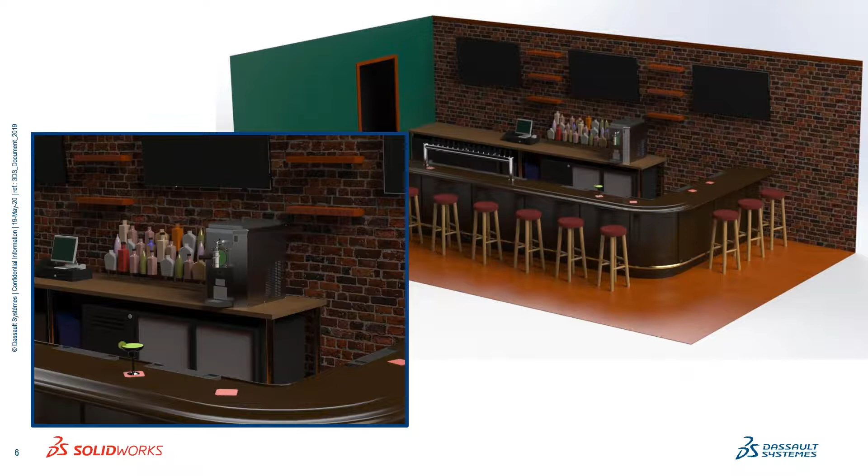So Thomas, we have here this design that we started with. We came up with an idea—I think it was the marketing team, or maybe the sales team, that said we need to come up with something new, and the first webinar had to be on Cinco de Mayo. So somebody made a joke about doing something with Corona, and that didn't really go over very well, especially given the circumstances we're in right now.

So we decided to go with a blender idea—somebody suggested it, and I thought maybe margarita. But as I started looking into it, I realized a blender doesn't do a lot for electrical—maybe a couple small buttons and a power cord you plug into the wall. So we came up with this commercial unit instead, which has a lot more to offer and can hopefully relate to a lot of our customers out there using these tools.

As you stated, the main goal was to take a project from start to finish—given the situation, with JP and I located geographically in separate locations—to see how we could collaborate similarly to the circumstances our customers are in, creating a project from start to finish.

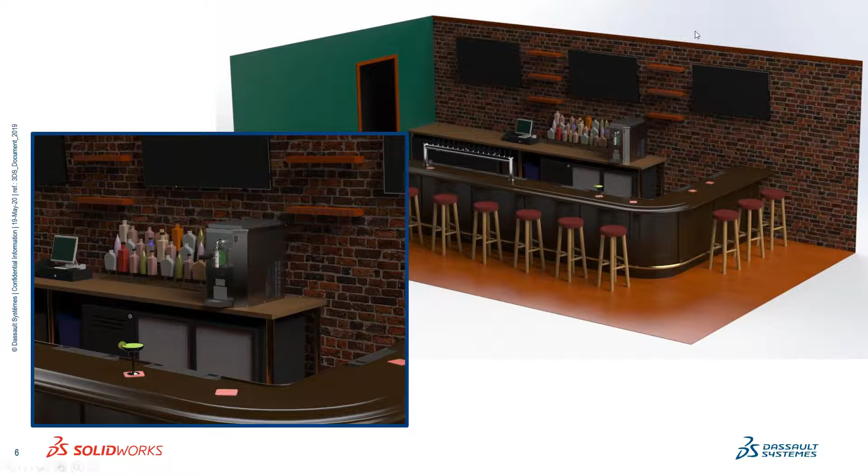For this webinar series, I'd do a whole bunch in a row if I could, but what we have here—let me close my webcam so you have full screen—are two sequential sessions. The first session, if you missed it, really drove the project creation and initial workflow; that was the one we held on Cinco de Mayo. During that session we talked about project planning in the 3D Experience.

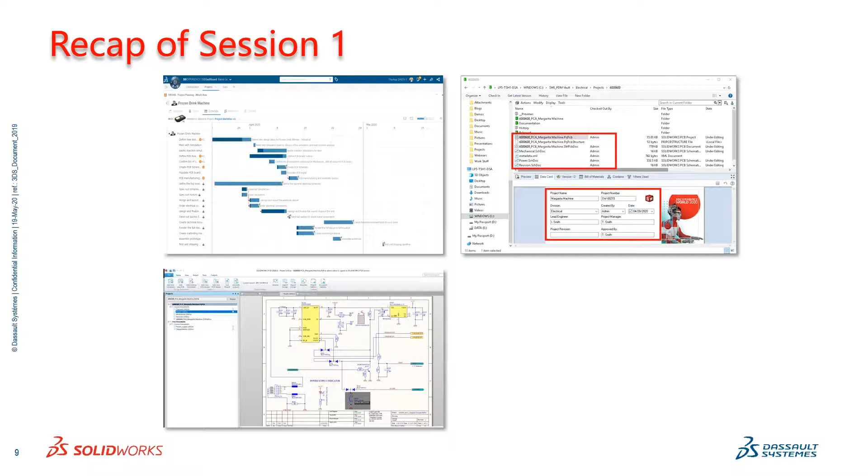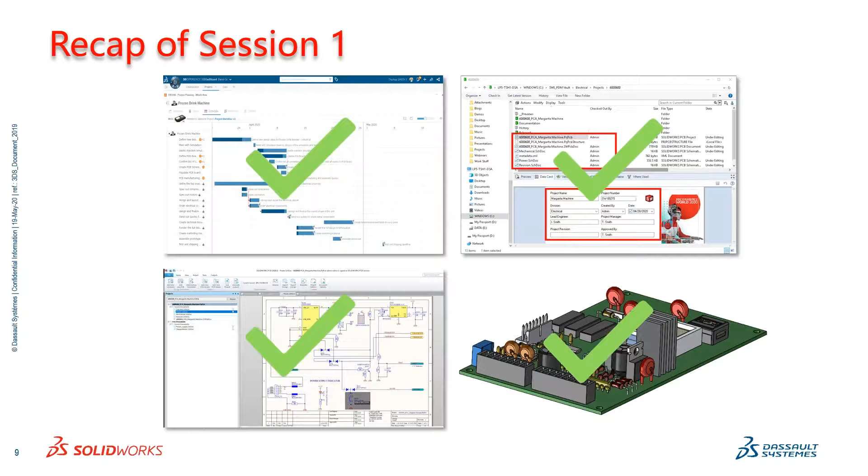We also talked about PDM, and we created our projects for PCB and SolidWorks Electrical inside of PDM ahead of time. Then we went into the SolidWorks PCB schematic tool and the layout tool, and we started to show some of the intelligent features within that tool, as well as the main piece of the puzzle when you're talking about SolidWorks PCB, which is that communication to SolidWorks itself, so that you can get your overall board design shape on the first try rather than the 7th try, saving you a lot of time and money in all the different iterations of that board.

Today's session is continuing in the design analysis and finalizing our documentation with our overall Margarita machine.

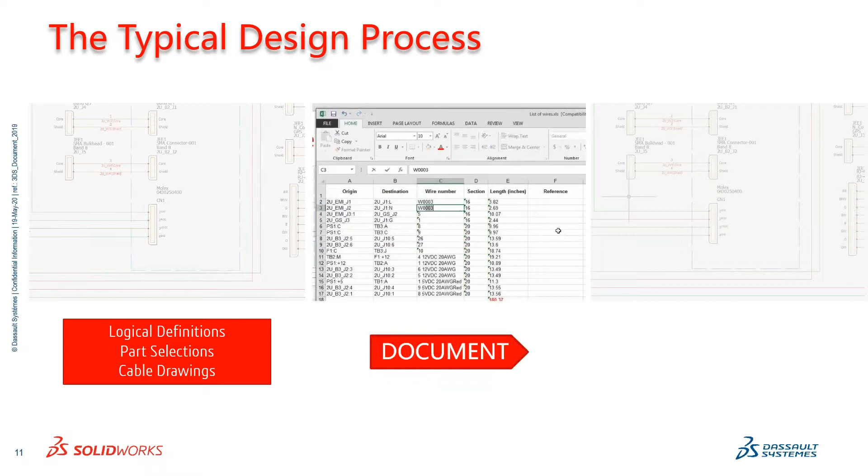If you're unfamiliar, the typical design process I see is people dropping in blocks, dropping in wires, drawing text boxes to create their schematic. Then they're taking all that information and pushing it into spreadsheets, creating their bill of materials and to-from wire lists in something like Excel. And then they still have to go in and audit all that information. That's the typical design process.

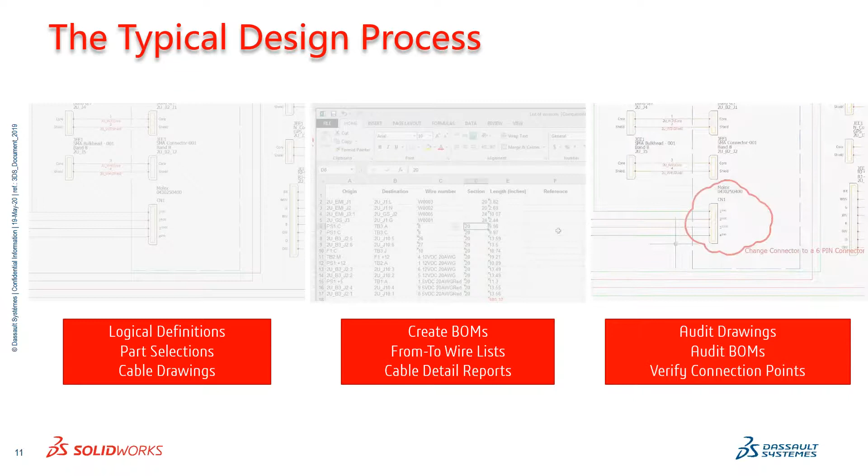But what SolidWorks Electrical allows you to do, I call it the SolidWorks Electrical difference. It allows you to take a lot of that auditing and reporting and bring it up front while you're doing your design, because SolidWorks Electrical generates and maintains accurate reports while you design. So if you drop in a symbol and add metadata to it, you are adding that information to your bill of materials. You don't even realize you're doing it, but you are, because of the way the database is structured and the way the software is designed, allowing you to do that smoothly, quickly, and intelligently.

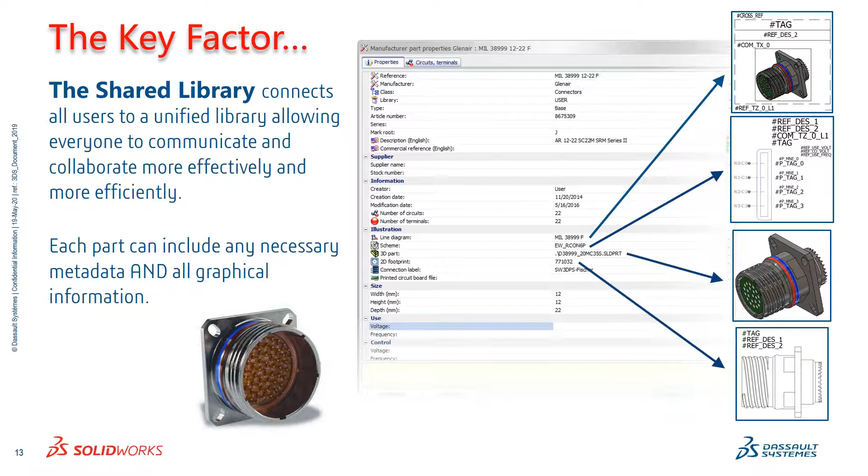There's information associated to those different symbols on our schematics and line diagrams, which we'll get into. But if I need to make a change to the manufacturer part information we see in that window, that information will then be pushed out to those symbols without me having to go to every version of that symbol in my schematic. It's automatically going to push that information out, which can be very helpful.

Another key factor is the bidirectional communication we have. If you notice in the center of the screen, the component tree is the same on the electrical side as it is on the mechanical side. So as the electrical engineer, if I define something, the mechanical engineer simply needs to select that part and can insert it based on the manufacturer part information, as long as there's a solid model associated to it. And the same thing goes for the mechanical side.

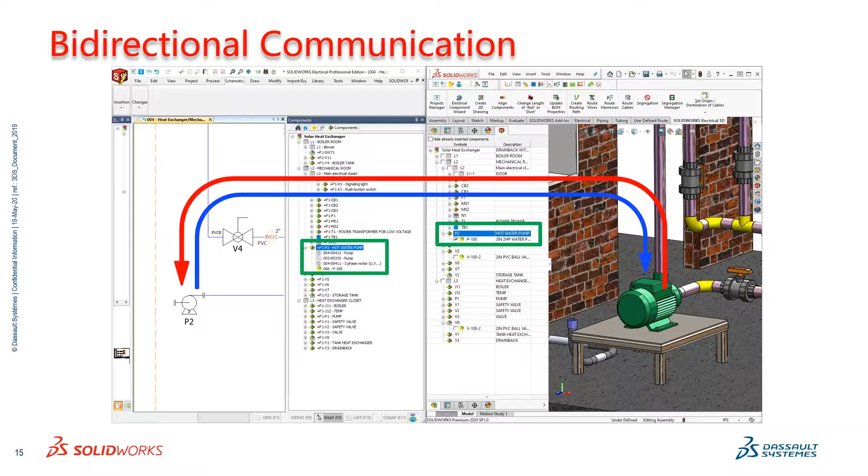If I'm a mechanical engineer and I know the spec of the pump, valve, or motor I want to use, whatever it may be, I can define that and add it to my component tree. Now on the electrical side, all I need to do is simply insert, and I've got the symbol that has been associated to that manufacturer part.

So what are we really expecting to see here today? Yes, we're working with a Margarita machine, but it's so much more than just a Margarita machine. I'm going to go in—I know I have a task pending in my schedule here. I'm going to go ahead and move that over so that I get notification, and the rest of the team gets notification that I am working on a particular task in our project.

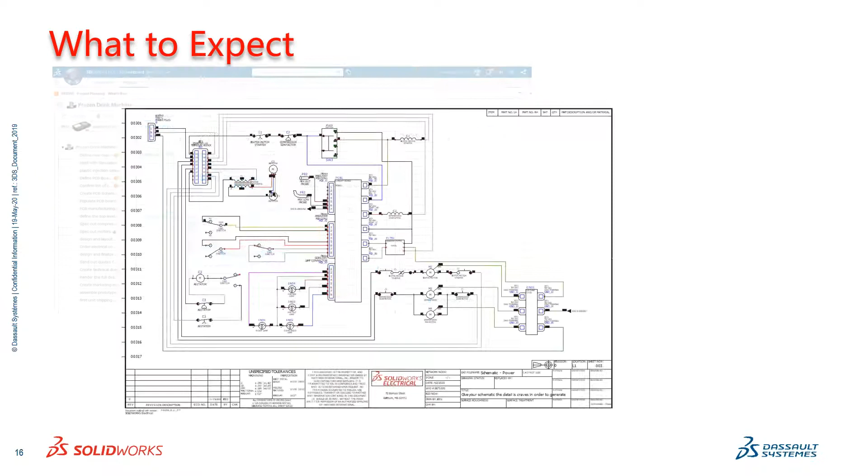We're then going to go into the intelligent functionality within SolidWorks Electrical. We're going to go into the 3D model and show some of the connection I just talked about, that two-way bidirectional communication, as well as our wire routes. Then we're going to finish it off with all the different types of reports we can create, as well as some other surprises I have along the way.

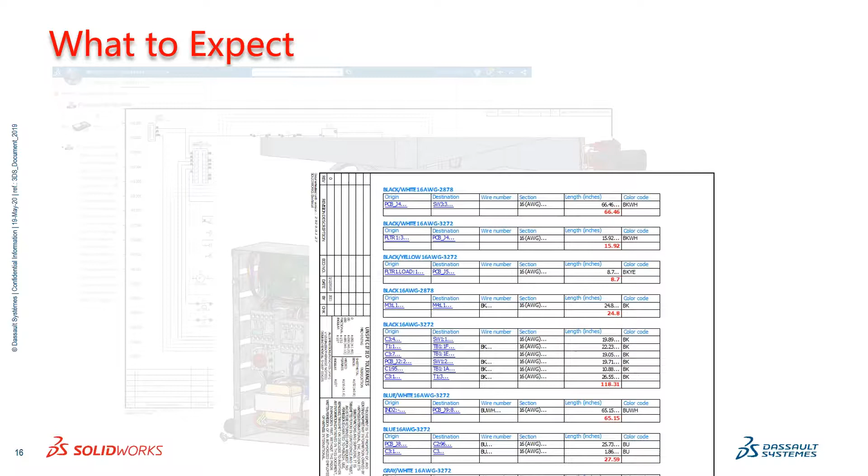So the first thing, as I mentioned, is our project planning. I am in Google Chrome right now, but I am also up on the 3D Experience platform in my dashboard that Thomas and I have set up for this particular project. We can see here, I have a lot of different tasks for this particular project.

This gives me a great view, a great timeline about this particular project. But there's also a way to organize these and see what I have pending, tasks that I need to work on within this particular project. One of them is this agitator circuit. I can add additional information about it, but what I really want to do is let everybody know that I'm ready to start working on it and that it's now in progress.

At the same time here, Thomas, who is the other person involved with this particular task, probably just got a notification on his side saying this task just went from to-do to in progress, letting everybody else know. And of course, I can have multiple users associated to that as well.

So additionally, let's jump into SOLIDWORKS, the tool that most of us, probably all of us, have seen or played with and enjoy quite a bit to actually use.

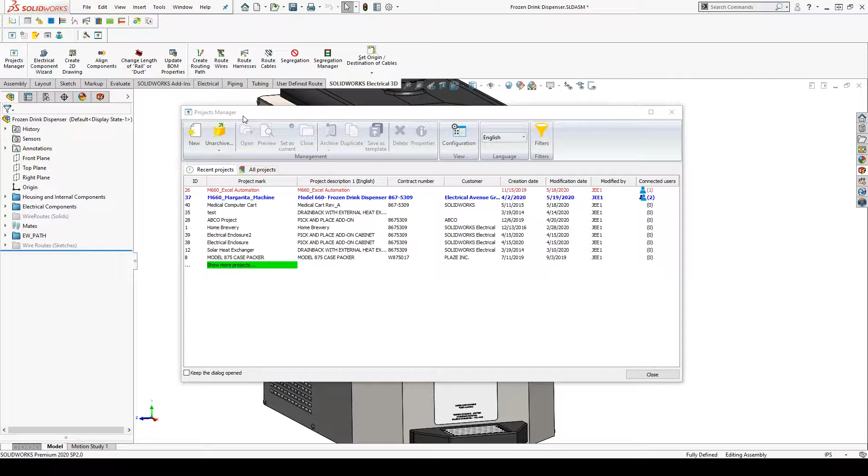When you're working with the SOLIDWORKS Electrical add-in, one of the first things you need to do is work with the project manager. You'll see this again in just a minute when we go over to the electrical side. The project manager is where all of our projects that have any type of electrical collaboration are controlled from. This is where we would open these projects up and control them.

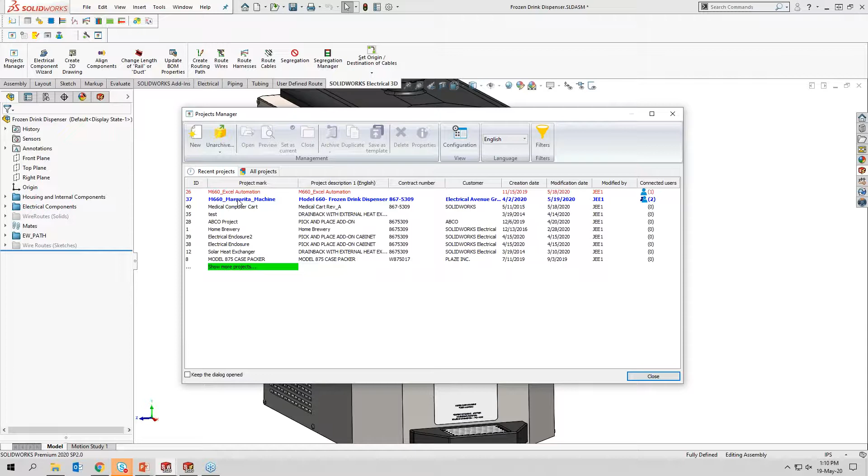You can see here that I actually have two different projects open. The blue one is the one you can see behind here right now, which we'll get to in just a second, and that shows I have that open here on the mechanical side. Anything in red lets me know that other users out there also have a project open. In this case, it's me as well on the electrical side, but we'll get into that in a few minutes. You can see that there's at least this visual aid to see who is working on what within your environment, so there's no confusion going forward.

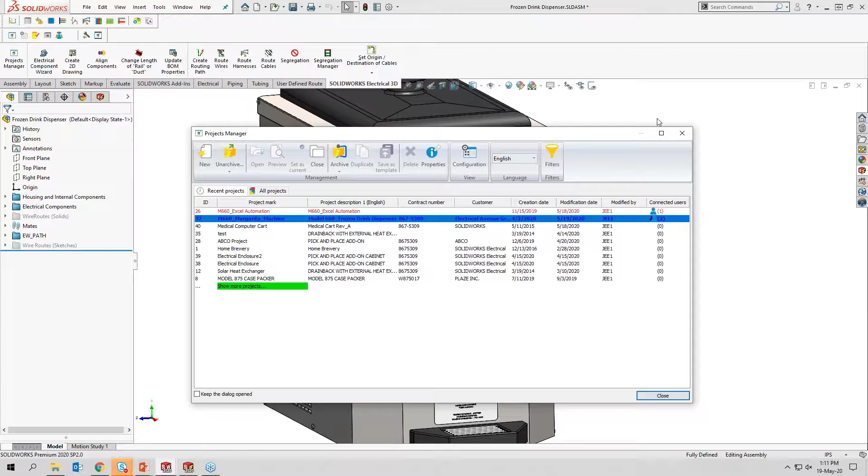But one of the things I do like to talk about is the document tree that we have inside of SOLIDWORKS Electrical, in particular the SOLIDWORKS Electrical add-in here. We can see within this document tree—let me expand my window here so we can see.

This is totally—hey, yes. We're experiencing some audio issues, and the audience, I think pretty much across the board, is just breaking up. Can you still hear me? Yes, it's sometimes breaking up. Just wanted you to know. All right, heads up on that. Okay, let me know again, cut me off again if it starts to. I hope I didn't lose anybody too bad on what I was just talking about with the project manager.

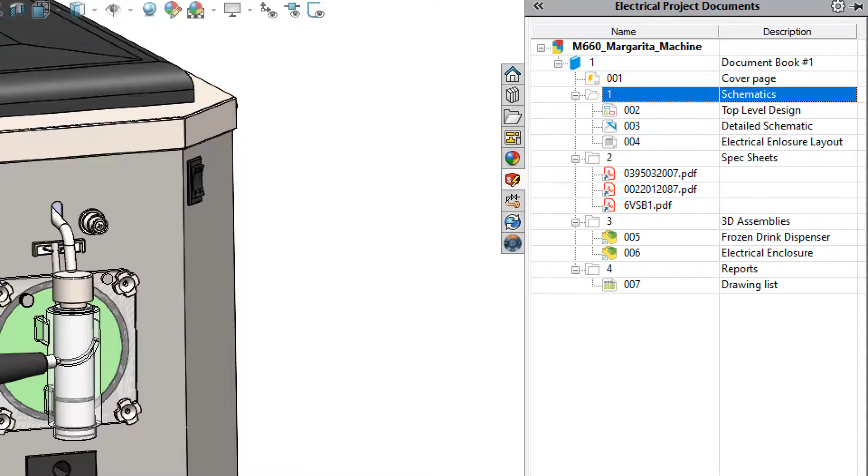All right, so continuing forward here, what we have is our document tree for this particular project. Now, this is how I organized it. Nothing says you have to have it set up this way. You can see here I have a book, I have folders within that book, but if you already have a company structure you like to conform to and set things up with, then you can definitely do that. We can help you define that project in a similar fashion.

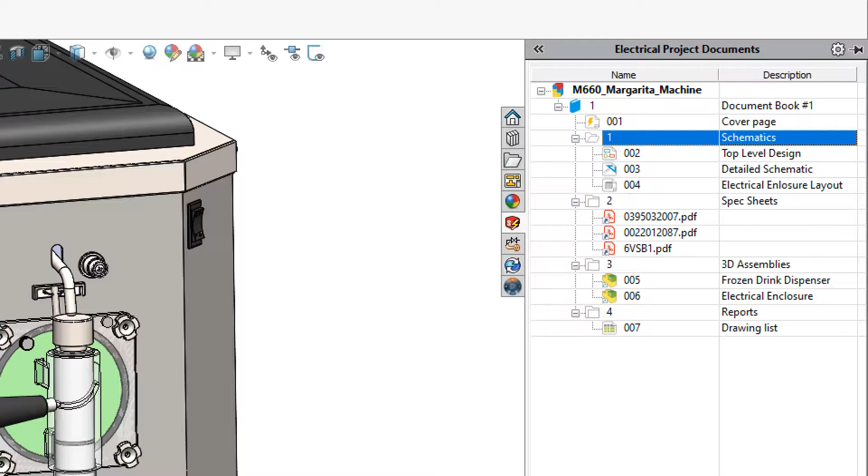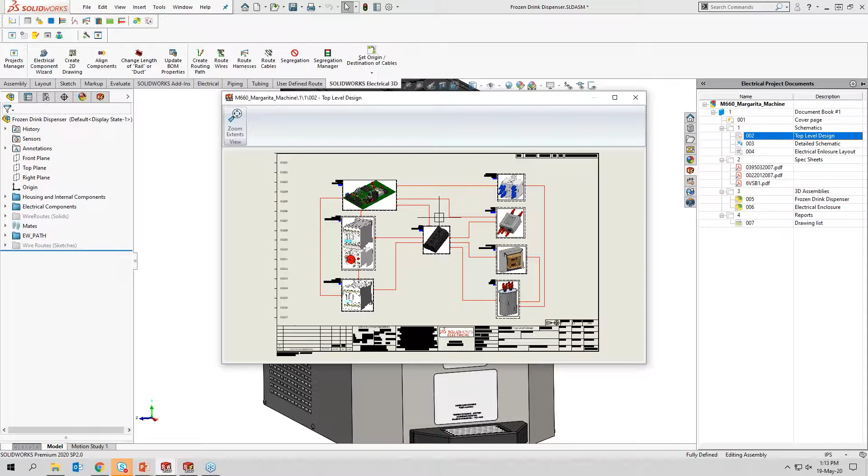Now, the nice thing about these document trees here, especially from the mechanical side, is I can go ahead and open up one of these files and see the progress being made on the electrical side. Now, I can't edit this file from the mechanical side, but I can at least view the information that is there. So if I need to know something about this particular circuit board or this contactor or terminal block, it's here, available for me to find out without having to track down the electrical engineer or whoever built this schematic—maybe they took off that day. So it's a nice way to figure out that type of information.

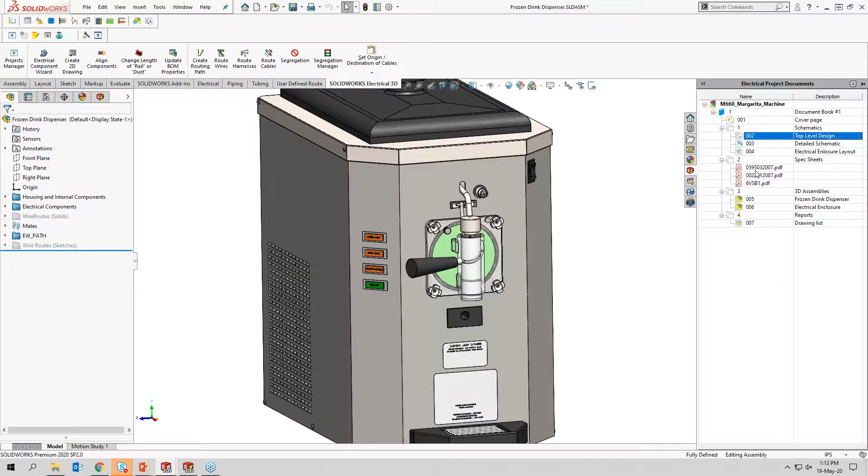The other really nice thing I thought was cool when I first started using this is the ability to actually embed spec sheets right into my project, or point to a folder where all my spec sheets are controlled from or housed, maybe in my vault. By having this hyperlink right in the project, there's no confusion about what parts are being used or any of the information about those parts. And if I have access to it, that means Thomas has access to it, and Joe and Ingy and Eric also have access to it.

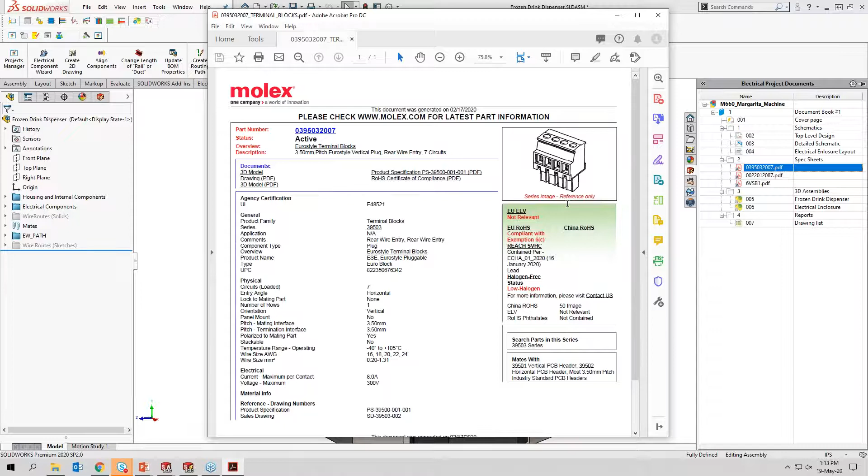Going back to our model here, our first look, I don't know if we really took a look at it last time when we were working with the PCB side, but you can see here we have our assembly. I have it open right now because I wanted everybody to get that visual aid of where we're going within our schematic. So let's go ahead and jump right into the SOLIDWORKS schematic tool.

I have SOLIDWORKS Electrical open, and the reason I have it open already is first I'll show the project manager. You can see here that both of them are in blue now because I have two projects open within my document tree. But the reason I have it open is because I've already checked it out inside of PDM, so this is connected to PDM right now. I have everything set up. We have a PDF in here, we'll get into this again in a little bit. I have everything organized just as you have it organized here.

And when I go to check this back in later, we can see the PDF, the Smart PDF as well, that we'll get into. I won't go too deep down that rabbit hole right now.

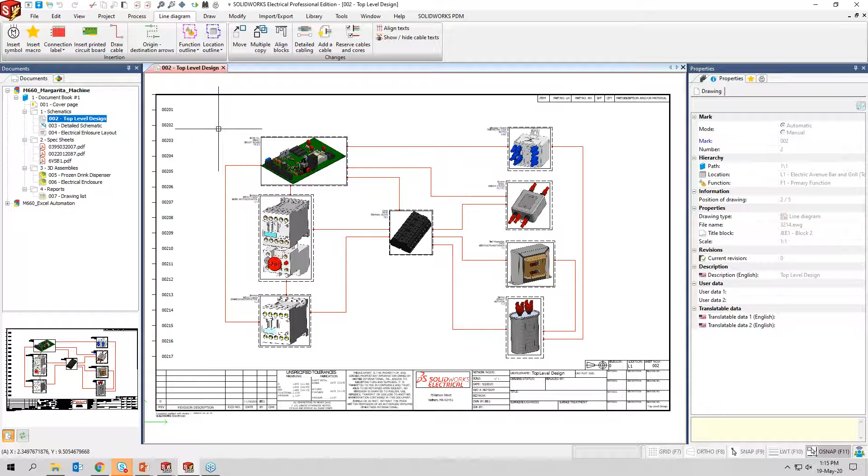Inside of our document tree, same document tree we just saw on our mechanical side, let's take a deeper look at the different types of sheets we have. The first one I call more of the high level overview or top level design, but it's a line diagram, a block diagram. This is just what I like to use it for because I'm always doing detailed schematics, but there are a lot of people out there who can just use this as their basic schematic. And by even creating just this basic drawing, I can connect models and start to create valuable outputs such as our bill of materials, our to-from wire report or cable report, and connect it to the 3D assembly as well.

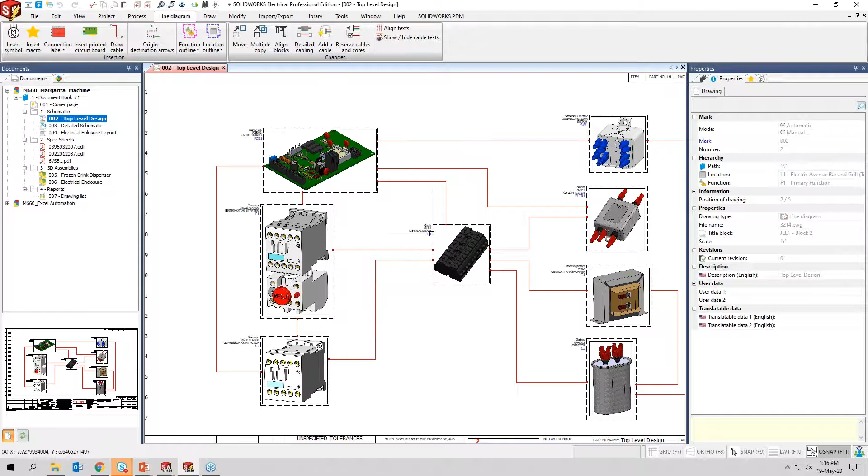And if we notice here, I can start with this. So maybe I don't know the detailed pinout yet for all my connections that are going to be on my circuit board, or what pins or connection points I'm going to be using within my contacts or my terminal block. But I do know I'm going to be using those parts, so I can start to really develop my bill of materials right from the get-go with just a basic symbol with just some basic metadata.

The other nice feature here, before I jump into the schematic, is our 2D cabinet layout. We have the ability to create a 2D cabinet layout on the 2D side before we even really want to jump into and invest a lot of time in the 3D assembly. We can also just do it here on the 2D side.

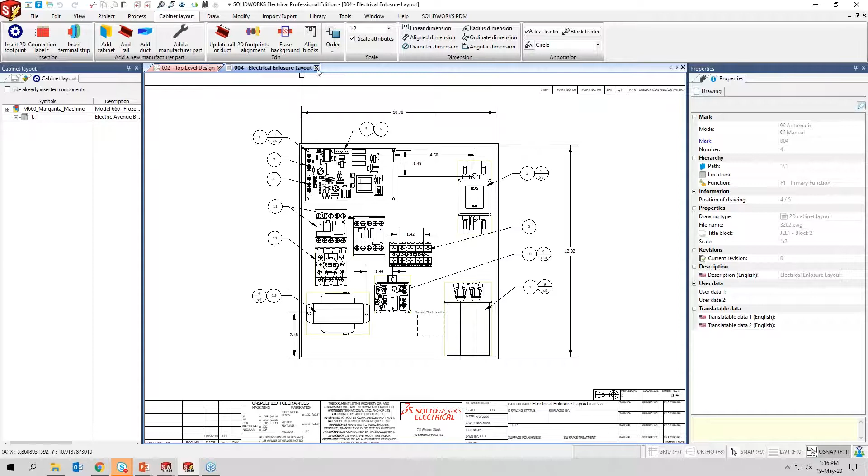I want to show you some of the intelligent functionality that's already available. If you want to learn more about adding symbols or drawing wires, we have plenty of other videos up on mysolidworks.com about how to create that information. But what we're going to do here is use a macro, not an Excel spreadsheet macro, but more of what I personally like to call a common schematic, something I'm going to use over and over again. In another project I worked on in the past, I've already created this agitator circuit.

I'm simply going to go ahead and drag this in, and place it roughly right here. I have the ability to change information about that before it becomes part of this project, but I know what I'm doing with it, so I'll go ahead. Let me try that again... I guess I don't know what I'm doing with it, it didn't do what I wanted. Here we go, so I'm going to keep the existing mark. There we go.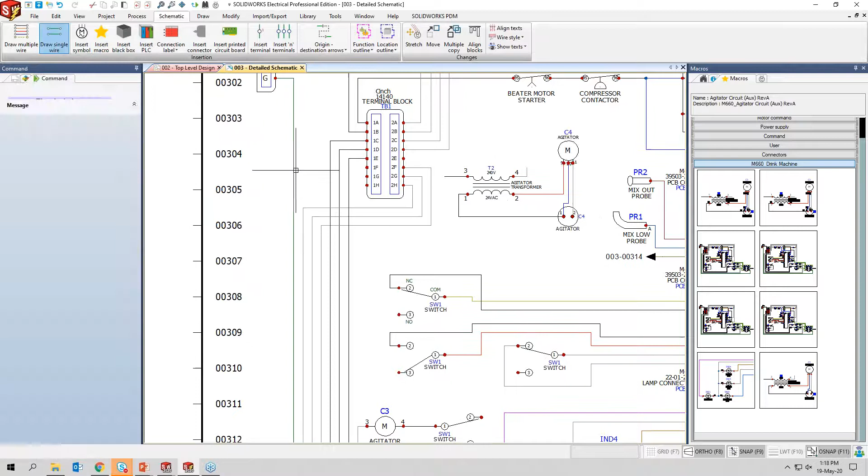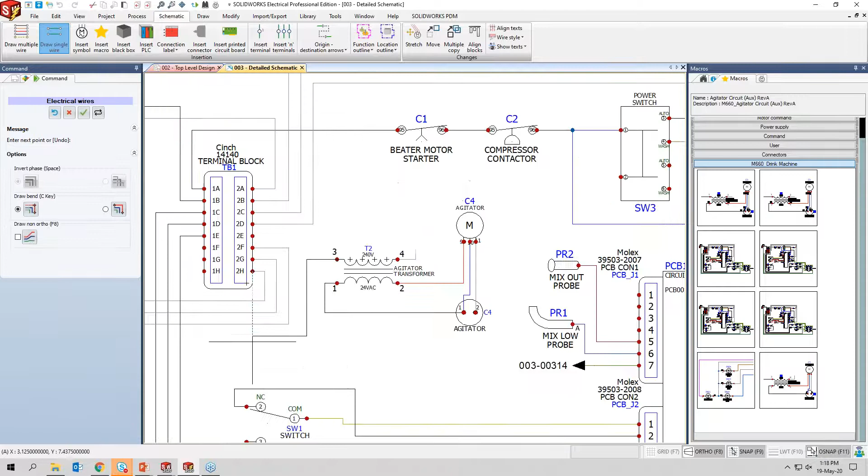I do need to go into the wire tool here for a second, but the really nice thing about setting it up this way is, if you notice in my macro, I have a couple different wire styles, a black wire and a gray wire. I don't have to go into my wire style manager to find the wire type I want to use. Based on the wire I select, it'll automatically grab the properties. I'll go ahead and hook this up, and do the same thing over here.

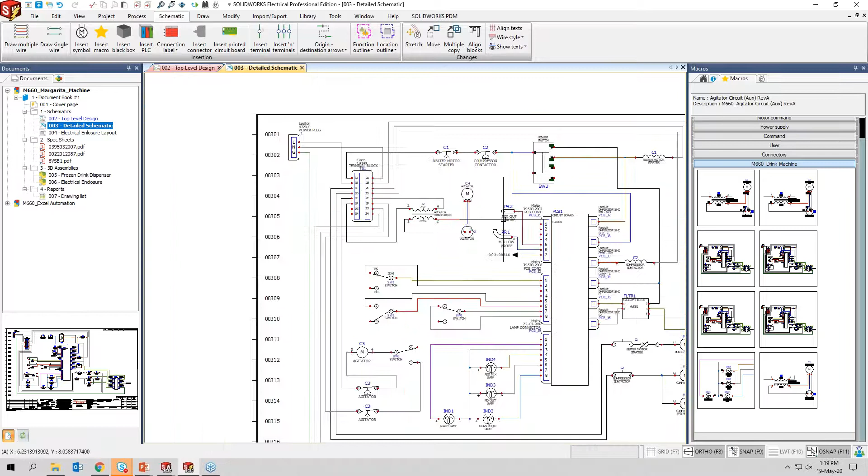And just like that, I've now created this new circuit. It took me a total of 30 seconds to really create this circuit. I did build it ahead of time, but let me show you how I built that ahead of time.

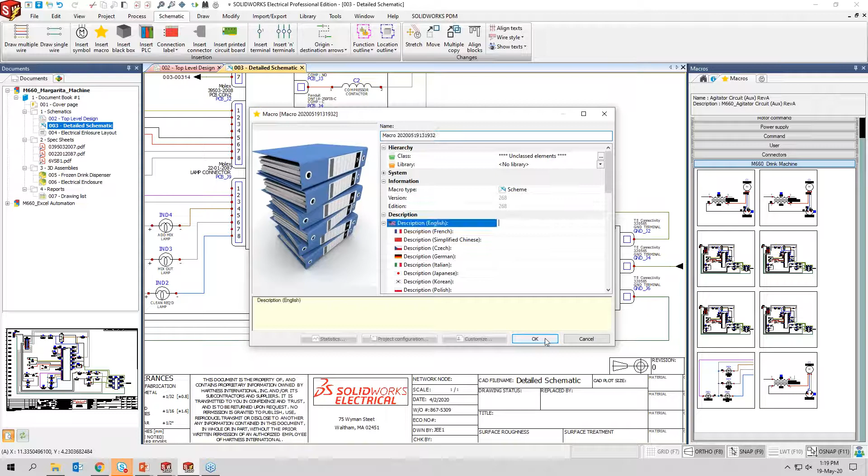So very quickly, in order to create a macro, let's say these circuits down here - maybe this part of the circuit is something I'm going to reuse down the road. All I need to do is simply highlight those parts, grab it right here, and drag it over into my macros palette. I can give it a new name, put it in a specific library, and define it a little more with a better description. And just like that, I've now created a new circuit that I can reuse over and over again.

It's extremely more intelligent in the fact that now I don't have to go find that old project I've been working on and copy and paste with the old Control-C, Control-V feature we all know and love, grab that from the old project, pull it in, and try to line everything up just right.

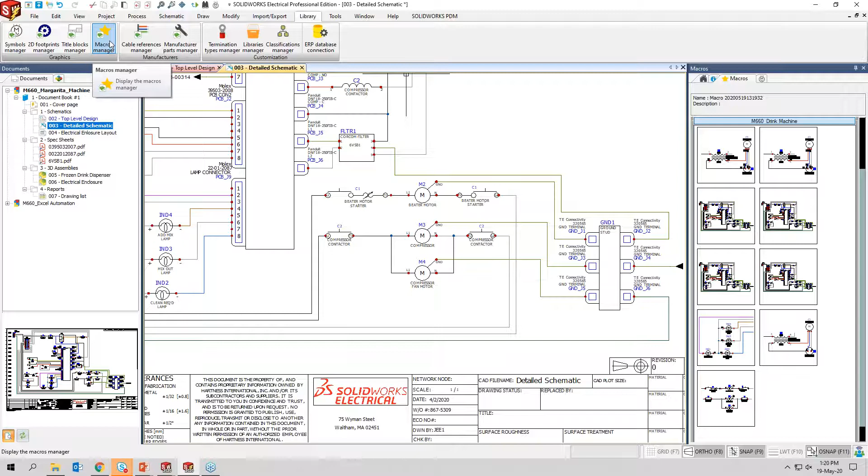The nice thing with this also is that all the metadata about these symbols and parts are included within that macro. The other nice thing is that because we have a shared library and my group here is sharing the same library, once I create this macro, immediately everybody else has access to that same macro. So I can be in charge of creating all this content, and everybody else can go ahead and utilize and absorb that information in their projects, depending on what they're doing.

Taking this a step further, the macro feature is probably one of the most powerful features in the software. If you notice here, I have several different versions of these same circuits on the right-hand side in what we call our macros panel, or macros pane.

There's a feature in SOLIDWORKS Electrical called Excel Automation. What Excel Automation does is allow me to take these macros, utilize the naming convention I have for these macros, and create an entirely new circuit based off of that.

Now, what do I really mean by that? Well, first let me go in and set this as current. And I'm going to go into my 3D Experience platform again, where I have what we call our project configurator. It doesn't want to play, so I luckily opened up the actual Google Sheet I have for this.

You can use a regular Excel spreadsheet or Google Sheet if you want to collaborate with multiple users. That macro naming convention that we have for each one of those macros, I've defined and made a list inside of Excel. And as we all know, Excel is extremely powerful. So why am I doing this? What is the purpose of creating this?

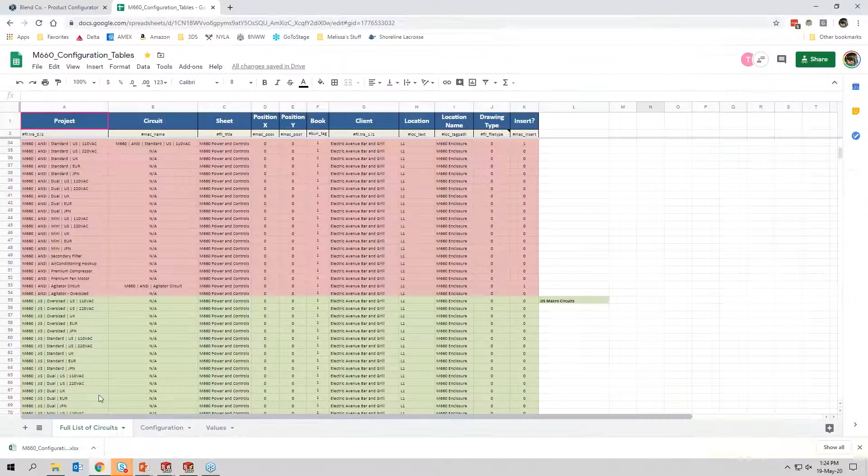And again, if you want to see it change live, if you don't believe me here, everything's set up as ANSI. I'm going to go over and I'm going to change this to IEC, and let's go ahead and take a look. Notice that those automatically change to IEC.

So now for this customer, I would come back in and go to download. I can find that - it's going to create another file for me. So very quickly, we can start working with the same schematic information, but be processing this in, and our design cycle becomes that much faster based on this type of functionality that we have here.

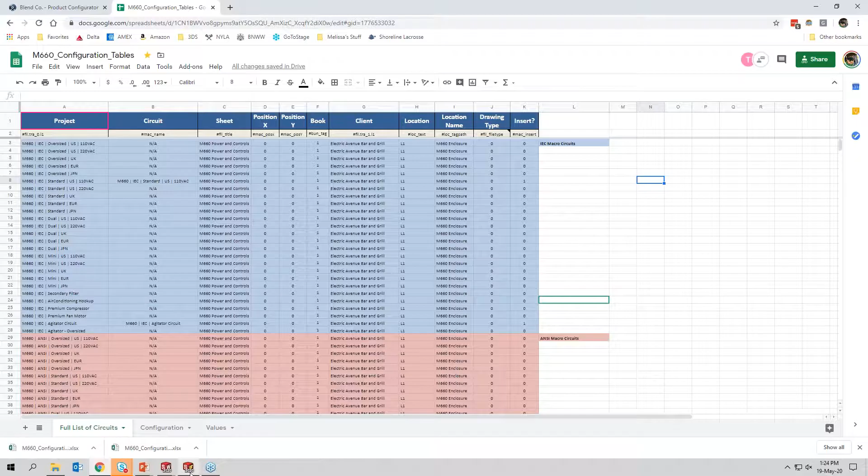Once we're done with our Excel automation, I'm going to go ahead and close that out. I just think that's a really cool feature. I wanted to bring that up. I think it's extremely powerful.

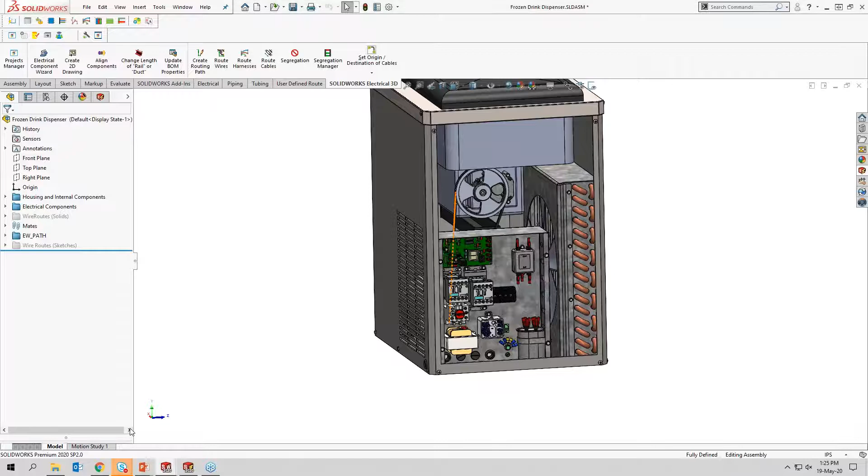But what we're really going to be working with here, again, is our main schematic. And let's go ahead and connect this information back over to our 3D assembly. So we have our 3D assembly after we did all those tweaks to our schematic, and we have our component tree, that same component tree.

Remember that slide I talked about, the bidirectional information? This is that component tree I'm talking about. Well, there's a couple parts that we just added, right? We had that transformer and we have our cap that we have to add in here. So what we're going to do is we're going to find those parts.

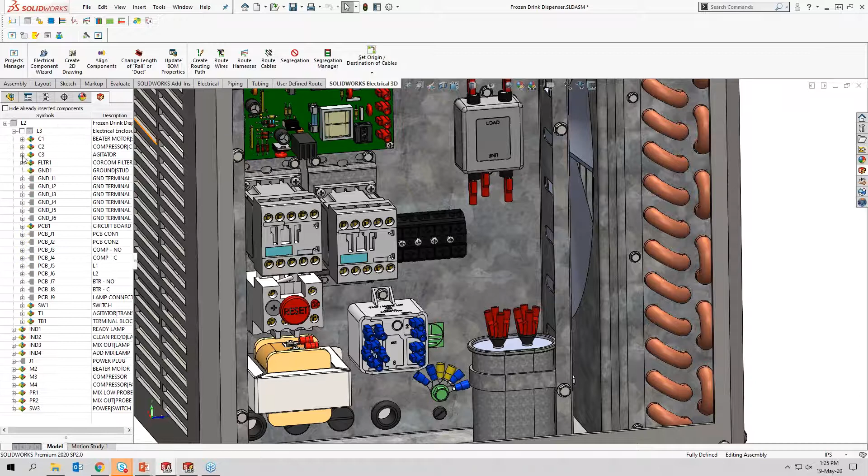And T1, which I think I was messing around earlier and I added them, so we're going to just remove them and I'm going to put them back in again.

So as the electrical engineer, a lot of people get scared when they try to jump into the mechanical space. There's a lot to do in the mechanical space, but what I want to show you is something that is extremely easy to do, and you don't need to know how to do a lot inside of the mechanical side of the tool. You can let the mechanical engineer or your team of mechanical engineers put this whole thing together. They can mate everything up and put everything where they believe it should go. But in reality, do they know which one is contactor 1, which one is contactor 2, terminal block 1, so on and so forth?

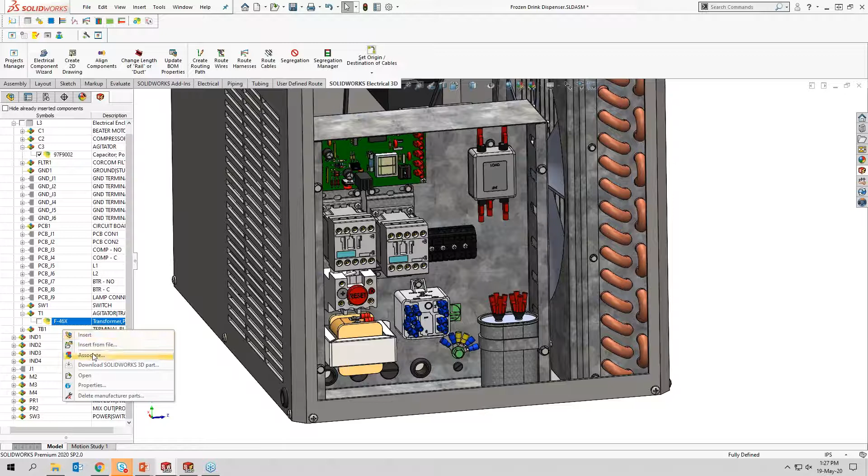Maybe, but you probably know way better than they do on where those parts are. So what you need to do is simply find that part. So in this case, T1, I'm going to simply select associate. I'm going to find that part, highlight it, I hit enter, and that's it. I've made that association. There's no manipulation of the model other than you're telling the software, hey, I want this to be called Transformer 1.

And just like that, may take a few minutes to get all those parts in there. I've already gone ahead and added all the information and associated all these parts up to my mechanical assembly.

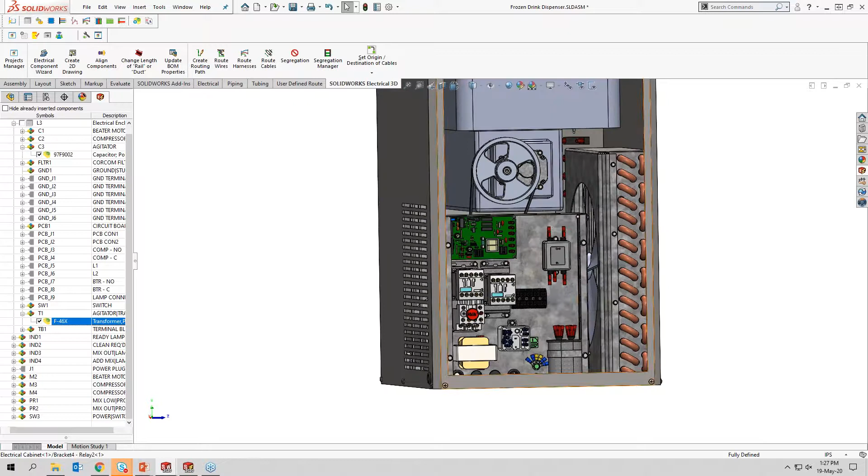Once I have that, the next step I'd want to do is go in and define what we call our EW path. Why do I want to create this?

Well, this is our guideline for our wires. Because if I just go ahead and draw wires and try to route them, we want to go in and actually get lengths for all the wires and cables in our project. We need to tell the wires where to go through certain bulkheads, around a duct, or up in the overhead, wherever that stuff needs to go. Otherwise, if you don't put this in, it's still going to route, but it's going to route where it wants to, not where you told it to.

So by setting this up, which doesn't take very long, it's a simple 3D sketch, we can go in, and after setting that up, we can route our wires, either as a sketch line or a full solid route.

Now, to save some time, I've already routed them, because we don't want to sit here and wait 3 minutes for a sketch and maybe 10 minutes for a solid route, which is still a lot faster than trying to route every single part by hand using standard points in the software.

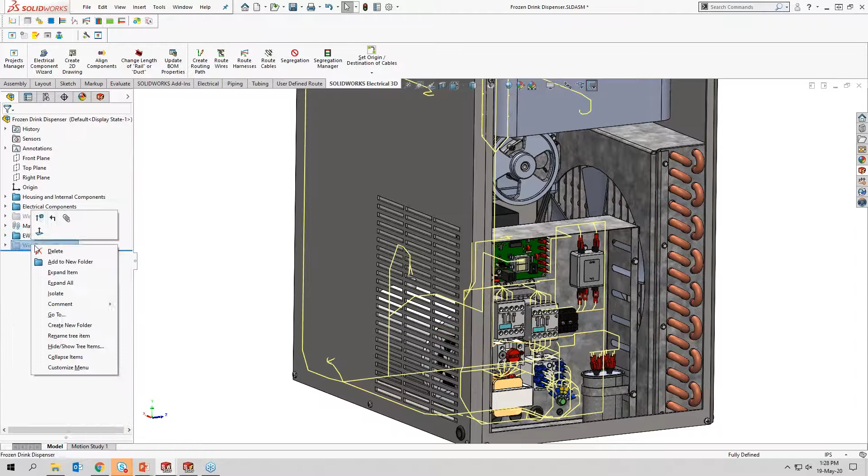So taking a look at those different types of routes, let's see what we get here for our sketches. You can see here, let's turn off our EW path so you get a better view. So this is what our sketch lines look like.

And the nice thing with sketch lines is it's a quick down-and-dirty view of what your wires are going to look like, and you also capture the length, so you don't even necessarily need to do the full solid route.

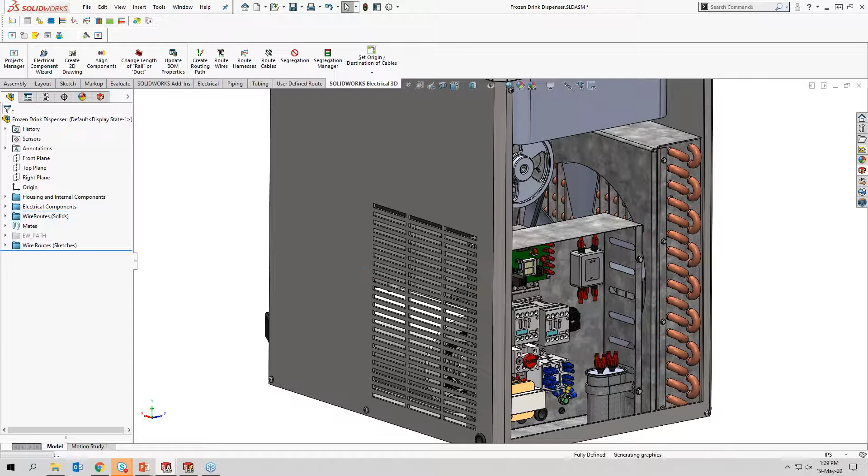But I know a lot of people like to see what the solid route looks like, so here it is for your viewing pleasure, the full solid of all the wires being routed, which is great. You can start to figure out fill duct ratio as necessary.

The other cool thing about it too is now I've created this, you may have seen an image on one of our platforms of where we push this information, this is marketing material. We have all the wires routed in here, and we have a nice visual aid to show our customers how neat everything can be inside of our cabinets moving forward.

And again, both of these options, routing sketches or full solids, will provide the wire length at the end. So now that we've got our wires in there, the next step we want to do is go back into our electrical tool and generate our reports.

So we have the ability to either do design rule checks, things like fill duct ratio, missing pins on a connector, too many wires in a connector, or maybe one of my other favorites, too large a gauge of wire for that connector, which you can define. It's metadata that you can define for that part.

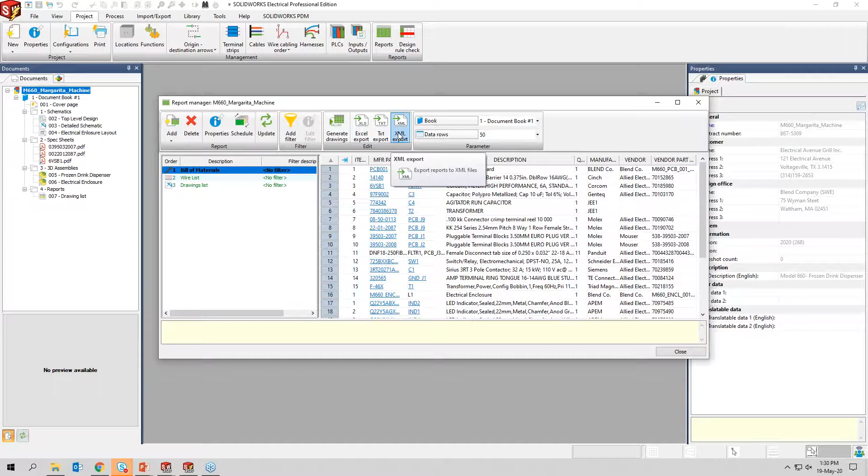But for this, I'm going to go ahead and do my bill of materials and my wire list. When I want to do this, generate my drawings, I'll create those. One thing I like to point out is I have the ability to export to Excel, to a TXT, or an XML file as well. For this, I'm just going to generate those files.

Let the software grab all that information out of the tables for this project. And just like that, we have our bill of materials.

Taking a look at that bill of materials, I've organized this based on location. Our locations for this are the top level of our electrical enclosure, the top level, the bar and grill, the image you saw at the very beginning of the presentation, and then the frozen drink dispenser itself, the small cabinet. So we can start to really organize our parts based on different locations within our project.

So you can have 3 or 4 or 10 different types of bill of materials. Maybe you want to create one bill of materials that's strictly for your logistics team.

Maybe you want to create a bill of materials just for the guys on the shop floor, because they don't really need to know where you got it from. But in my case, you can see vendor and vendor part numbers. I get a lot of my parts from Allied Electronics. We have a good partnership with Allied Electronics and RS Components, so I utilize a lot of that information with my manufacturer parts.

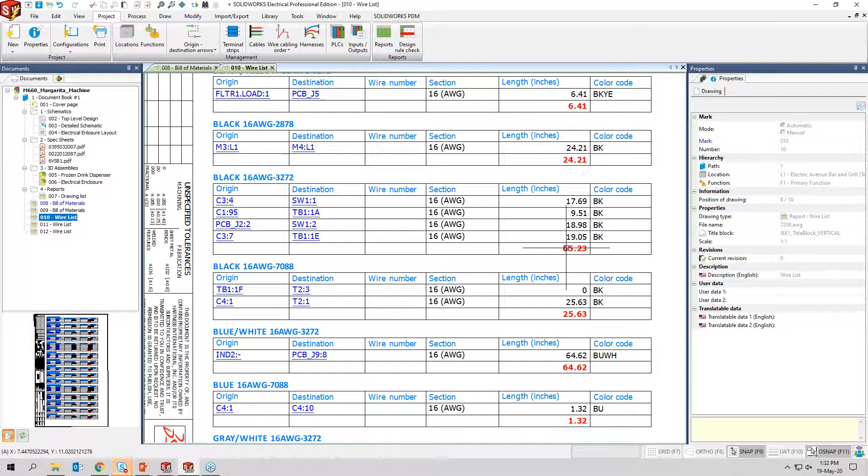Taking a look at our wire list, we can see not only each individual wire and its specific length, which I can convert to either inches or metric, but it also gives me a total. So depending on the wire type and how much I'm using of one specific wire, now I know ahead of time how much I really need to order or how much to charge the customer based on how much wire I've used.

So going back real quick, what we just did is go through the project planning. I created that and moved the project over, which afterwards I'm going to mark as done. We took that task to do and made it in progress. We went to the intelligent functionality - I really didn't show a lot. As far as the macro goes, that's the main meat and potatoes behind creating our schematic. There are so many more intelligent features I didn't cover, because creating a terminal block drawing for this particular assembly didn't fit into the grand picture. But creating terminal blocks and terminal block drawings is another really intelligent feature, and I do have other webinars I can share if you want to see more about that.

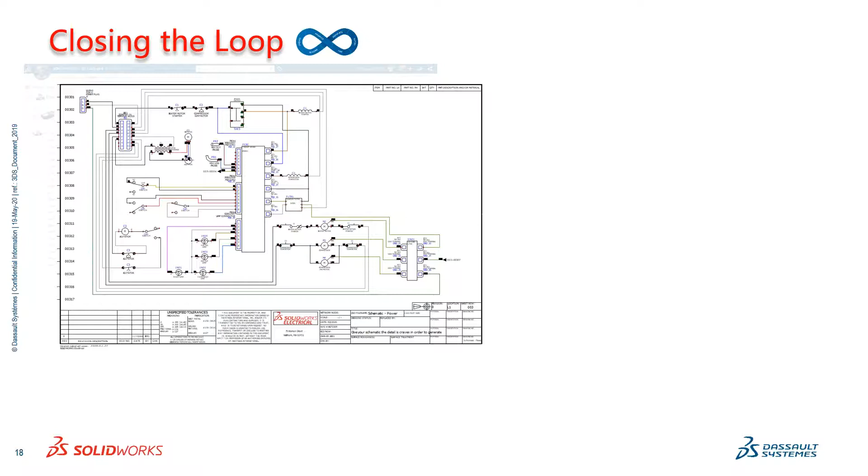Origin destination arrows and all the information about those as well. We took a look at our 2D cabinet layout - nothing says you have to jump into the 3D space. If you want to utilize just the 2D side, go for it. We have the tools here to be able to do that as well.

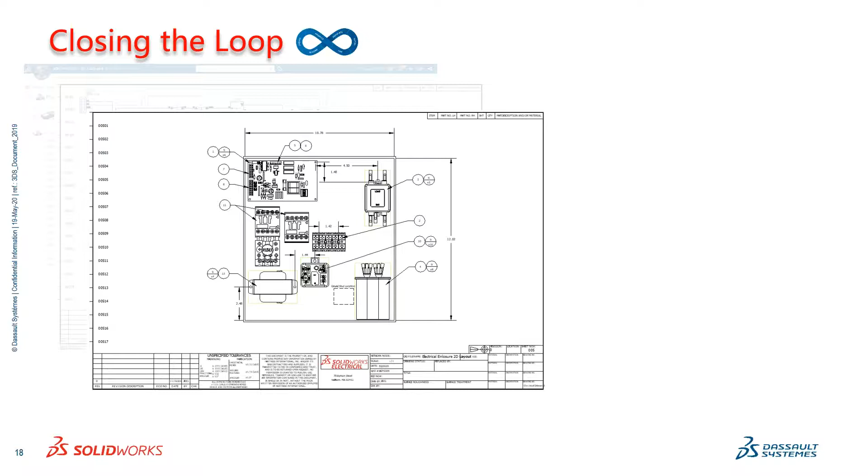And then our Excel automation, which is one of the most extremely powerful features of this tool altogether. Why reinvent the wheel? We can really have a... what's the word I'm looking for? I'm at a loss for words right now. It just helps to organize our structure, our process going forward within our organization.

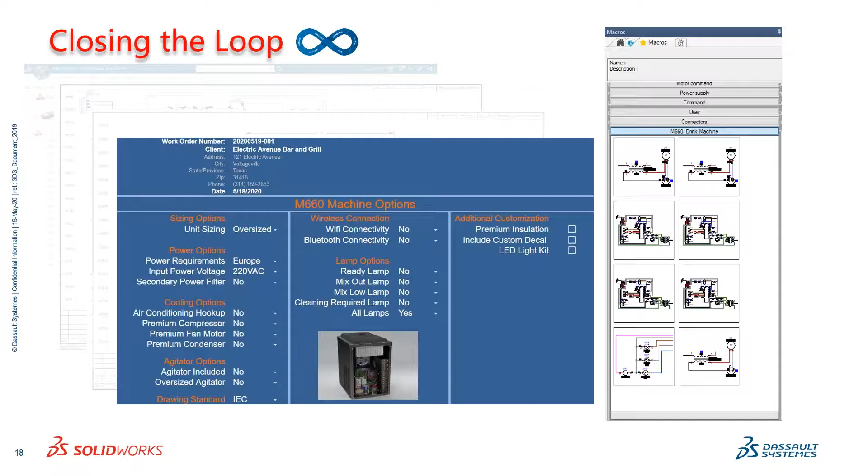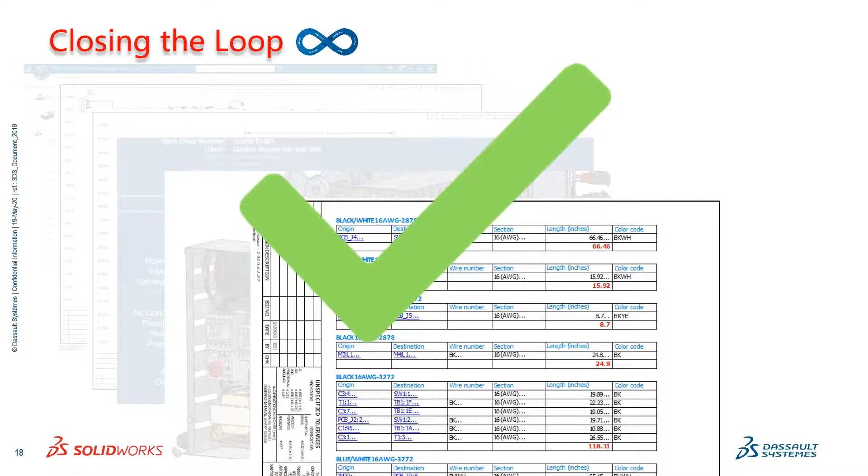And then finally, we went through the 3D model. We looked at all of our wire routes and created our reports. But closing the loop, that was just on the electrical side. Over on the mechanical, on the PCB side, we didn't really finish this off last time. I want to close the loop with what we did in PCB. We also have all the exported files and file types we have for SOLIDWORKS PCB.

Now, Thomas, I don't know if you want to talk about this for 30 seconds, about what we have for PCB. You there? You're still muted. All right, JP, yes, I was messing around with the mute.

So yeah, closing the loop, on the PCB application side we're also able to export all our manufacturing files - whether that's the Gerbers, the ODBs, the drill files, etc. All of that can be generated automatically with various options inside the PCB tool, and then also within our PDM workflow as represented here. We demonstrated in the previous presentation managing all the project data, the schematic sheets, etc. And here you can see, again full circle, also managing all of the outputs inside of PCB as well.

So one other thing - these are all the different types of files you created for this? Yes, if you look in the explode out there, it's an automated process of creating these outputs - they're all generated in here, and this particular one's just showing some of the Gerber files contained within the Gerber folder. All of that, again, is automatically generated either from the application, and then with the PDM workflow managed, so the whole enterprise can have access to that.

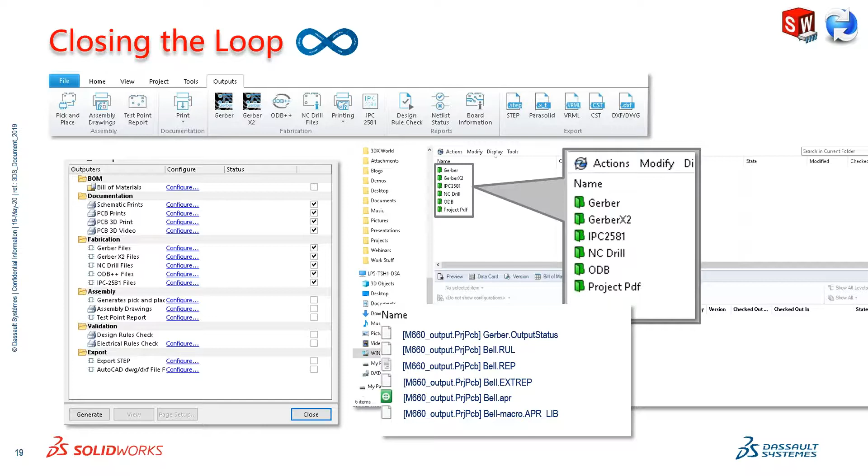Taking this a step further, I had some of the members of my team help me out with other parts of our product suite for this particular simulation. We created these really awesome visuals to help us define and design this assembly.

Quick story on this: when I first created this assembly, I had no idea how to really design a fan blade at all. I created a piece of sheet metal to make it look like a fan, because I was really trying to do the electrical side of the house. But when I passed this off to our simulation team, they said, this isn't going to work, you need to actually build something here. So I went in and learned how to build a fan.

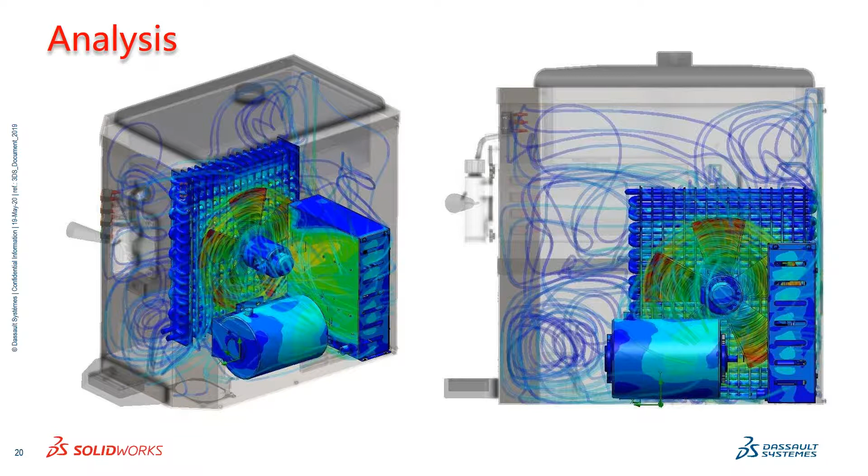These are some of the images they provided to show the cooling and the flow of air within this assembly. They also sent this cool little video to show how that behaves with the circuit board, as well as some of the other components within our assembly. So there's a lot of stuff you can do, not just simulation.

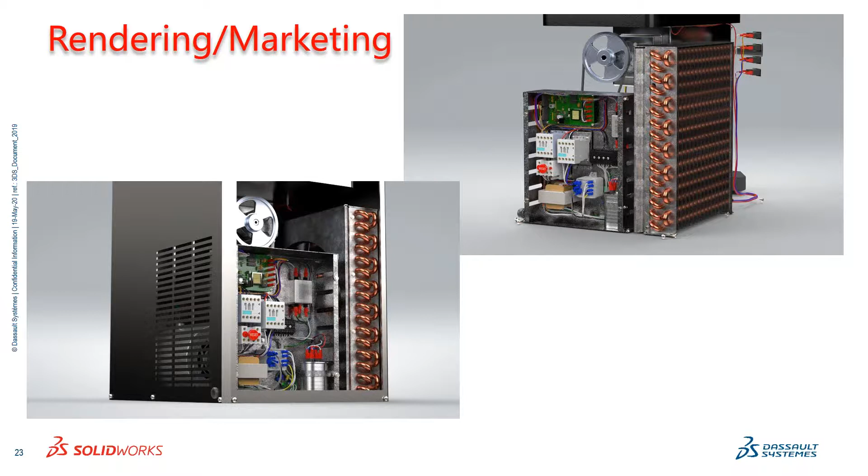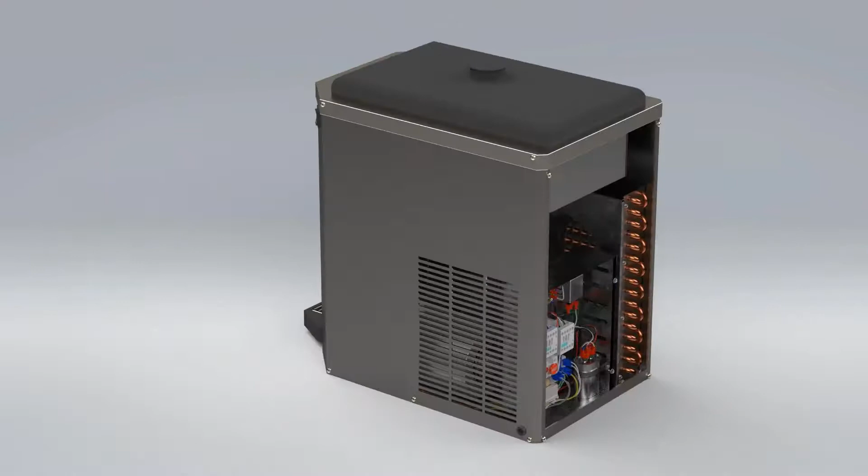This only took a few minutes for me to create inside of SOLIDWORKS Visualize, and you can see I thought they came out pretty good, hopefully everybody else does too. You can also do things like this and create some cool visual videos to really tell the story about your design, what the machine does, and give specs on it and stuff like that.

So again, you have to think about these kinds of things. Who else can I share my data with? Who can I communicate effectively with? Again, the design teams, the assembly teams, the CAD admin, and so on and so forth.

The overall benefit of this, without a doubt, is the communication and collaboration between specifically the electrical and mechanical design teams. Everything I showed today was really trying to connect the dots between the mechanical and electrical engineers to help make their lives easier, so you're not constantly acting like a gopher, putting your head up over the cubicle wall to talk to the mechanical guy back and forth. A lot of this stuff is to help you streamline that process altogether.

So with that said, I know I threw a lot of information at you, and I barely scratched the surface on what this tool can really do. But we're going to open this up now for some of the panelists we have here to help out with some questions.

Yes, so I'll help facilitate those questions, JP. And I just want to start by saying thank you for the presentation. I really enjoyed how we can see all those different pieces coming together, that was really good to see. So with that, let's jump into the questions. In fact, we'll start with you, JP. Let me grab one here.